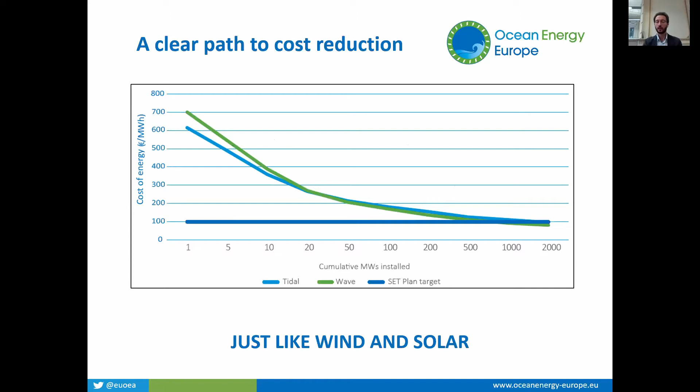Europe by 2030. Now, one of the main, and maybe the main path to cost reduction is deployments. It creates learnings and allows developers to improve their devices, but also lower costs through scale. And we can clearly see that with appropriate supports and deployments, wave energy is going to be affordable in the next few years. The good news is that wave developers are not alone in this, and there is EU support currently and in the future coming to help develop new wave energy projects.

First, there are national recovery plans. As you may know, there's a recovery budget that's been voted during the summer at EU level, extra money on top of the usual European budget dedicated to the recovery post-COVID. And the national governments are currently designing their plans. They have to design plans to be approved by the Commission to receive the money. So now is a good time to talk to your governments and ask them to include wave energy in those plans.

Secondly, the Commission is currently designing an EU offshore renewable energy strategy. Now, this strategy was originally an offshore wind strategy. We managed to turn that into a strategy including also tidal and wave energy. And this document is going to be the basis for the Commission support to the sector in the next few years. And we're obviously pushing for efforts on permitting, marine spatial planning, but also investment in research and innovation.

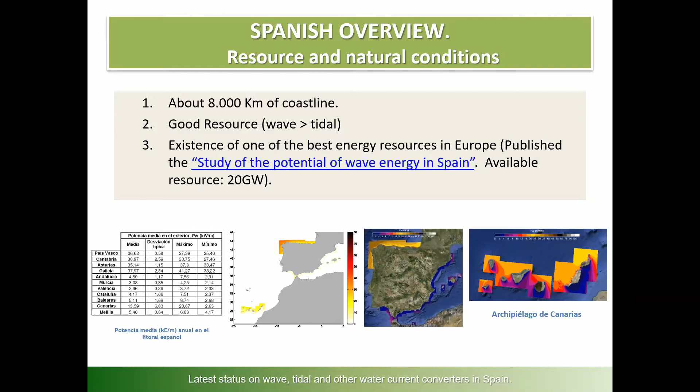And you can see here on the bottom right the Canary Islands, where there are good resources in the north of the majority of the islands. Regarding the infrastructure and scientific capabilities, we are talking about different sites and different test labs in real environment, and this is relevant.

We have experience deploying renewables in our country, and it was done not just based on commercial or business development, but with plenty of researchers behind it in order to make it happen, mainly related to wind and solar in the past, and mainly onshore. In addition to that, there are plenty of capabilities related to the marine industry, shipbuilding, ship construction, maritime operations, that can be a great value chain that can be implemented or adapted to marine energy in the near future.

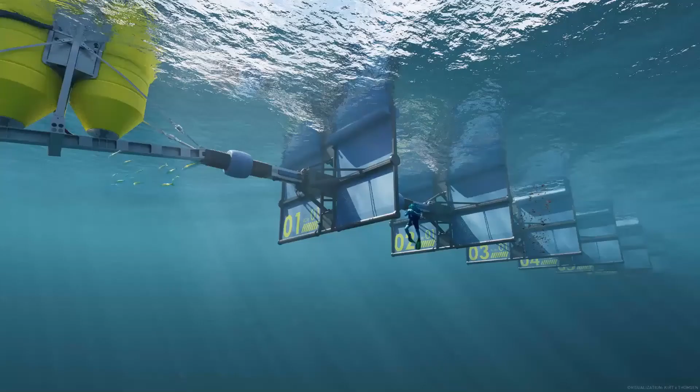So what we are focusing on, we have two products: renewable energy, so electricity based on renewable energy, and then water. So it's a double product. And we focus on waves, that's why we are here today. And we all know that the potential is very large. The problem is, of course, how to harvest it efficiently, and so we need some good technologies that show we can be competitive, and that hasn't been possible until recently. And we claim that the Wave Piston technology can be one of those technologies that can make wave energy competitive.

And for those of you who do not know how it looks, this is the system. We have many plates placed on what we call a string. So we have all these plates, called energy collectors. So it's a modular system, with a mooring at each end. And all these energy collectors are pumping up pressurized water for energy conversion to electricity, and also for desalination.

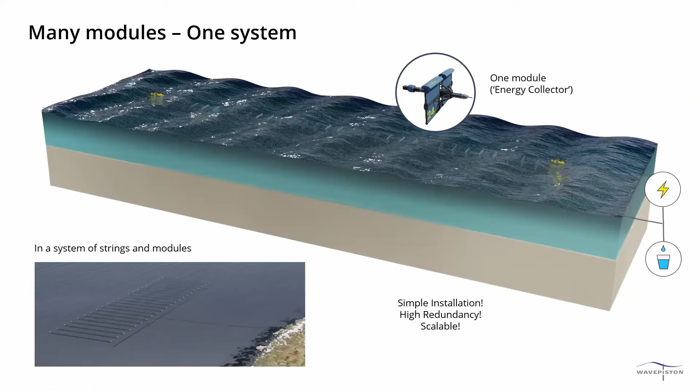And we can place many strings next to each other, so we have a modular system depending on what is needed at a given location. So just to understand a bit more: we have these energy collectors. You have the example here.

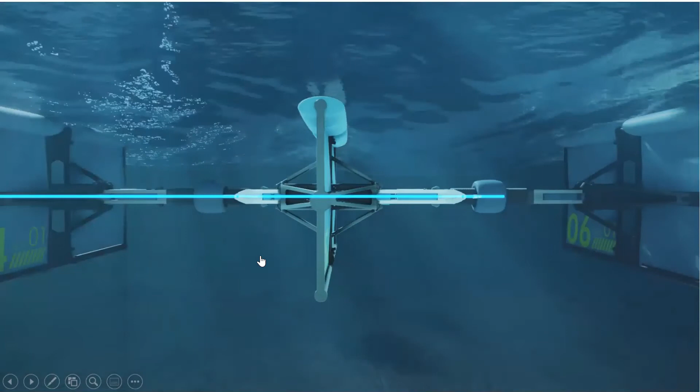They drive 2 pumps, 1 pipe on each side. So both ways it pumps water into a main pipe. So we have no electrical cables out in the ocean. It's a hydraulic system. And this pressurized water, up to 60 bar, is then pushed up to the shore for conversion.

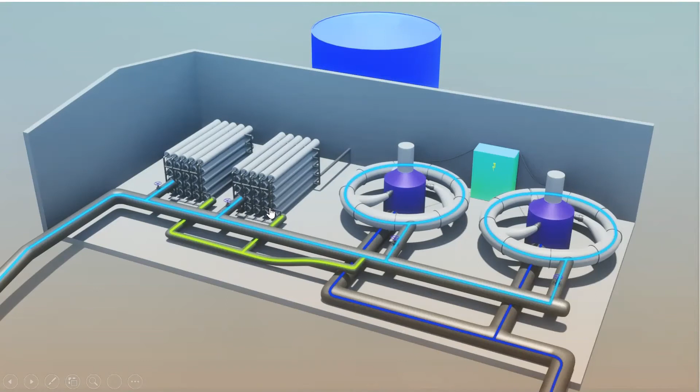And here on the right side, you have the turbines that can convert it to electricity, so power conversion. And we also have desalination, because we work with pressurized water. We can use that in a reverse osmosis system to do desalination. So those are the products we come with.

And why is this interesting? Also seen from an island perspective, of course, some of my colleagues also talked about this. One thing is the cost of things, but also the value of the energy. Wind and solar and their cost is extremely low now, which is very, very good. We need more.

And that's why we say, okay, we need waves also, because it can complement wind and solar power. And also, as many of you know, we can produce power at different times than wind and solar, because it's time-wise shifted. So the value of energy is also very important here.

The second thing that is interesting when you look at ocean energy and wave energy is that we do not spoil the view. So it's a more non-intrusive system, we call it. Many places that we go to, islands and remote locations, you cannot put wind turbines up for different reasons, or there's not enough land. So wave energy can go in and be this complementary energy source in these places.

And then looking at our solution, where we have both electricity and water, in these smaller systems and microgrids, we can make a higher efficiency of the system. We can dimension it better, because when there is surplus energy in the waves, so the consumption is lower than what we can produce, it is relatively easier or cheaper to store water, so we can produce more water when that is needed.

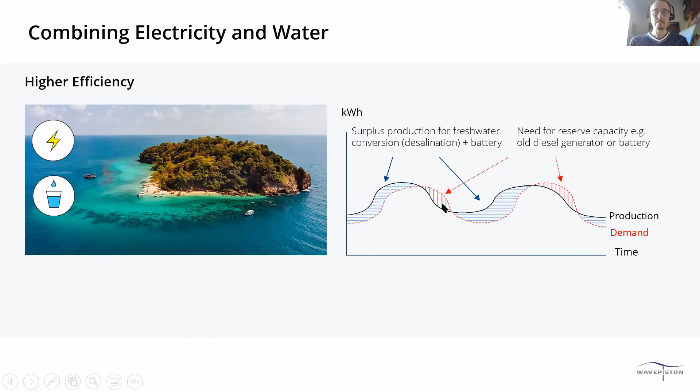So we're working with these very important sustainable development goals, 6, 7, and 13. So energy, water, and climate action, which is also important when we look at how to get support and financing going forward.

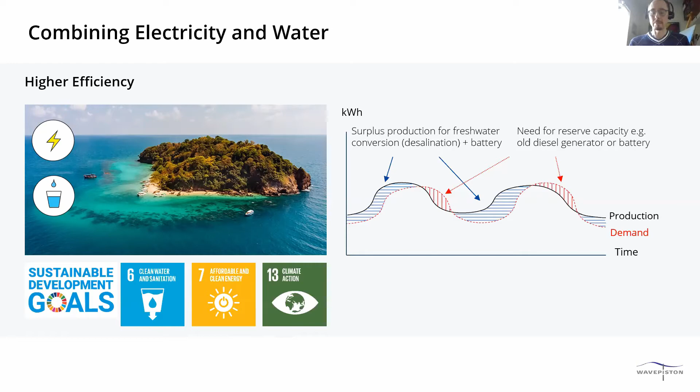And latest, we had an installation at the end of 2018, and then 2019, where we had our last installation in the North Sea. So that is finished. Our prototype phase is finished, and now we are focusing on our demonstration phase. And we are now in the warm embrace of Joaquin and his people at PLOCAN in Gran Canaria. So we're going to install our first full-scale system there,

where there are actually two projects. The first project focuses only on power generation, and in the second project we can install another string, with a combined solution of both power generation and desalination. And for these projects, we have received grants from the EU, the SME Instrument Phase 2 and the Fast Track to Innovation. So we have 5.5 million euro in grants there.

And the total project for this phase is approximately 10 million euro. And we are very happy to get these grants, of course, because it's quite competitive. So that's ongoing. These two projects are our main focus right now.

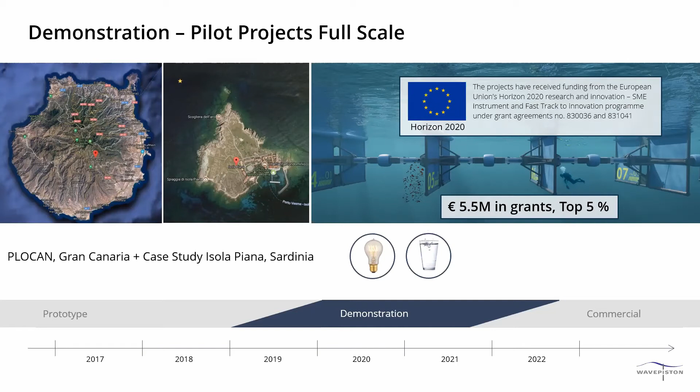The ambition is to get an installation with a peak of around 200 kilowatts for one string. So it's 24 energy collectors. We'll get that out next to the PLOCAN platform, get the pressurized water to the platform, and add the power conversion.

A similar system, if it was only water, could produce 150,000 cubic meters of desalinated water. In the project we have this combined solution, dimensioned for 28,000 cubic meters of water per year. That's what we need to show in the project.

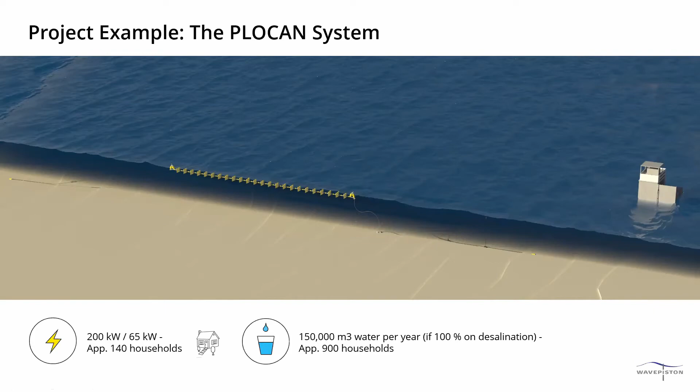So we have already assembled other things, but it's not the final system. We have pushed in what we call a pre-installation, because it's a big step for us going from the prototype, half scale, quarter scale, some places for half scale, and then up to a full scale. So we want to test a few things first.

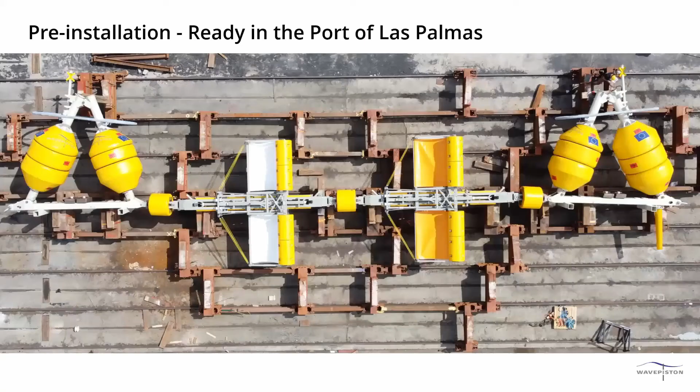So we have 2 energy collectors we have assembled, tested, and now we will put in the water actually tomorrow. It's lying here in the port of Las Palmas. The system buoys don't have anything, they only have the buoyancy and keep the system stretched, in pre-tension together with the mooring. And we have 2 energy collectors that will be installed hopefully next week,

if weather and vessels, etc. allow. So that's very exciting, and this is what we call pre-installation, to test different parts of the components on the system, and then next year the full installation will be installed in summer 2021. So that's the plan.

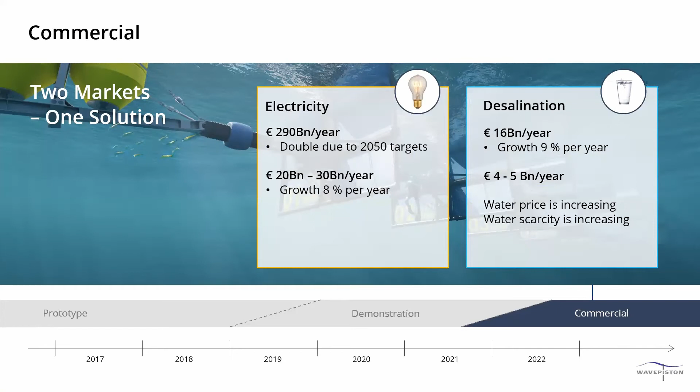Okay, so looking from a commercial side, we all know this is very large. Renewable energy investments are very high. You also have very high investments in new desalination plants. There's a large growth, so it's very good, but also a very competitive market. So coming in with a new technology and not starting with the utility scale side, we need to focus on something else. And that is why we have this 2-step approach to get into the market.

Let's focus first on what we call relatively small scale systems, for islands, isolated communities, etc. As we just heard from Francisco, they have a very high price per kilowatt hour. Actually, the Reiner Lemoine Institute in Germany looked at islands between 1,000 and 100,000 inhabitants, where the average price of diesel generator power is 38 euro cents. And many of these places also have very large water scarcity.

So this is a very interesting market, and we're already in contact with a lot of these places to prepare for the next projects after this phase, what we call the commercial phase. This is like the stepping stone into the utility scale market. But we first need to get experience, get the first system out before moving into this very large utility scale market. We need to focus on the islands first. That's where we believe the stepping stone is.

Okay, so we are a relatively new company. We have a new technology, new sector, and a new market, or an established market, but coming in with wave energy is of course not something you just do like this, even though you have a good technology, a good product that you have shown in some tests before.

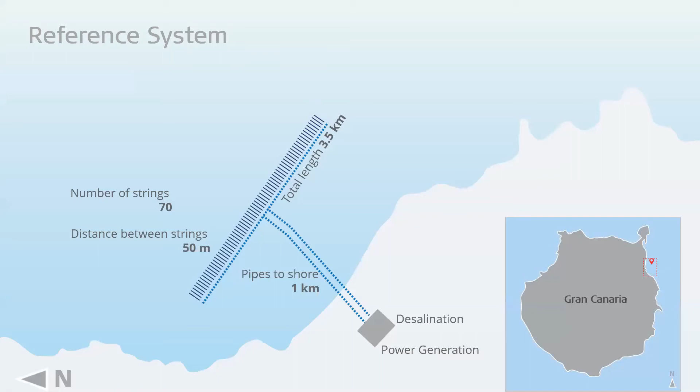Some people think it's big, but from a utility scale point of view, it's not. Then we put it out there, and we have our energy tool with simulations. How much can we produce? This is what we need to show now with these systems that we are installing at PLOCAN.

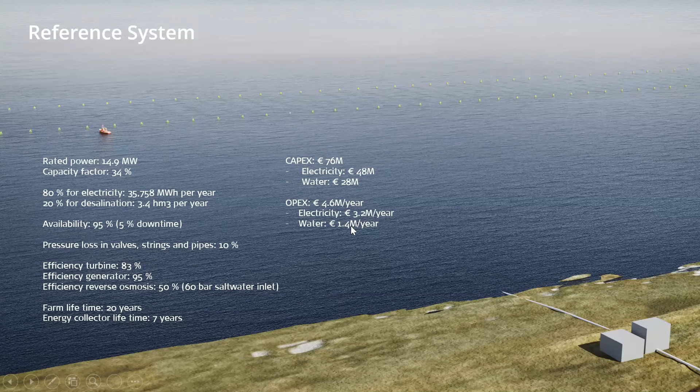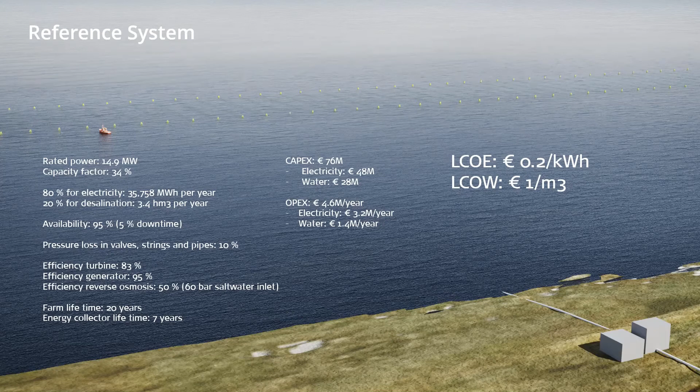But this is what we need to show now. So we need to show results. That's very important in our sector, not just talk, but results. And then in 2022, you need to come and knock on my door saying, Michael, have you shown this or not? But that's the purpose of what we're doing right now. And that's also how and why we can get into this market also on the islands.

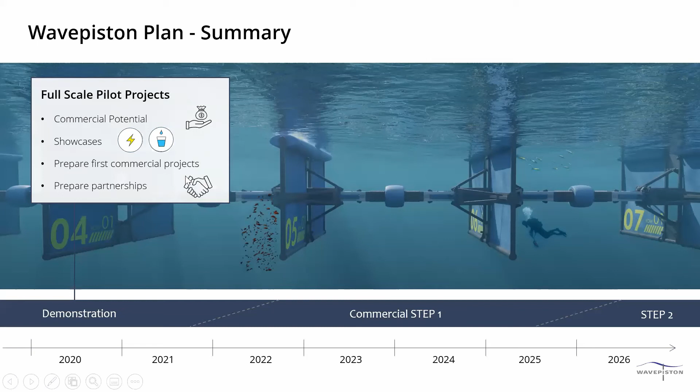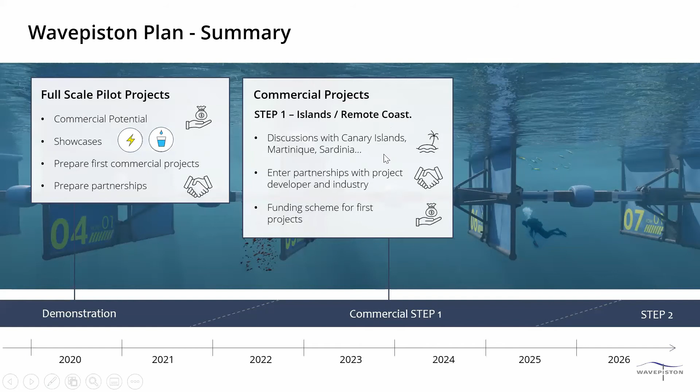Okay, so summing up, we're focusing right now on these full-scale pilot projects to validate, to create these results and prepare these first commercial or pre-commercial projects. And then we move into island, coastal communities, hotel resorts, etc. That is what we're looking at. And then later on, we can start opening up the utility scale box. That's our strategy.

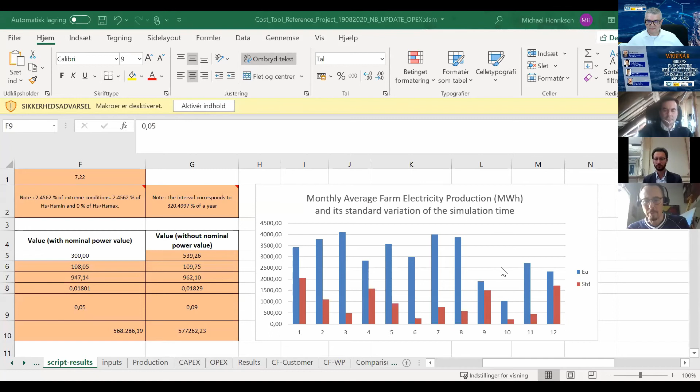This is like the production over the year in PLOCAN over 3 years. So there are of course a few months where there's not that much, but actually it's very, very stable there, looking at the wave climate there in the Canary Islands and over the year. So this is actually one of the very good places to go and put up a wave energy farm.

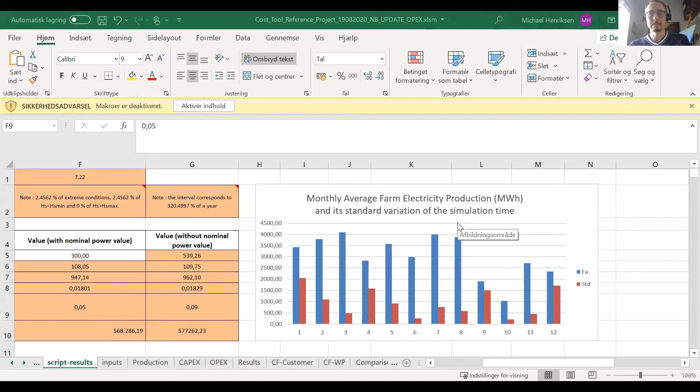Thank you, Michael. So I have another question. Do you know about protected areas, SAC, Natura 2000? There are limitations to place marine energy farms in Gran Canaria due to this. Have you considered it? Is there any possibility to negotiate with those authorities? So Francisco, would you like to answer that, or maybe I also give some inputs?

Let me add a specific point, and then you can go with your input. It's related to the spatial planning, and this is an exercise that the main stakeholders in Spain related to the ocean are working on right now. And in this document, they are taking into account different aspects, not just environment, but other uses of the ocean. And then it's very important to be there and to be active in this process, because if we cannot get a specific area or specific areas for marine energy, we are going to have a significant problem in the future, because if we don't appear now, we are not going to have room for the future. Sorry, Joaquin, go ahead.

Yeah, no, completely agree. I think that these are essential to synchronize, I mean, to work together with marine spatial planning, because otherwise we are not going to achieve the objectives of the Green Deal and also the offshore strategy for energy. So in the Canaries, 40% of the marine space is protected in some way or another. But there's plenty of areas where the activity could be compatible. And also, of course, in some areas, even in protected areas, the nature of protection for the ecosystem is compatible. But anyway, let's start first outside of those areas and let's see how things go.